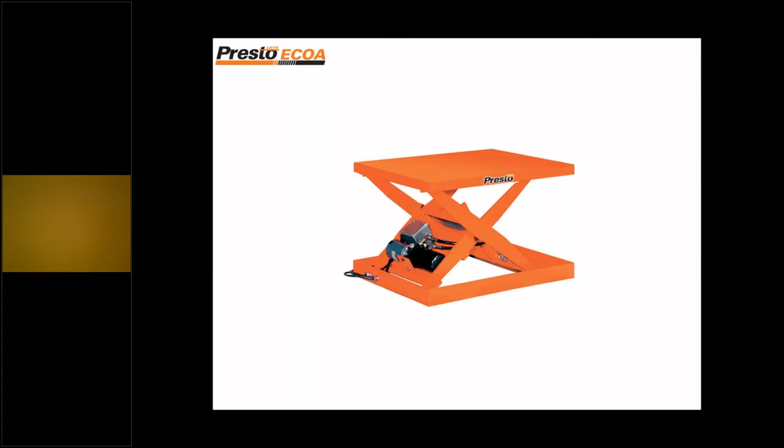So we're going to start today with Presto Lifts. Presto Lifts is our largest line that we represent, and lift tables is our largest category. There's about $150 million a year in lift tables sold in the US every single year, so there are a lot of opportunities. And what sets Presto apart is we're an American manufacturer.

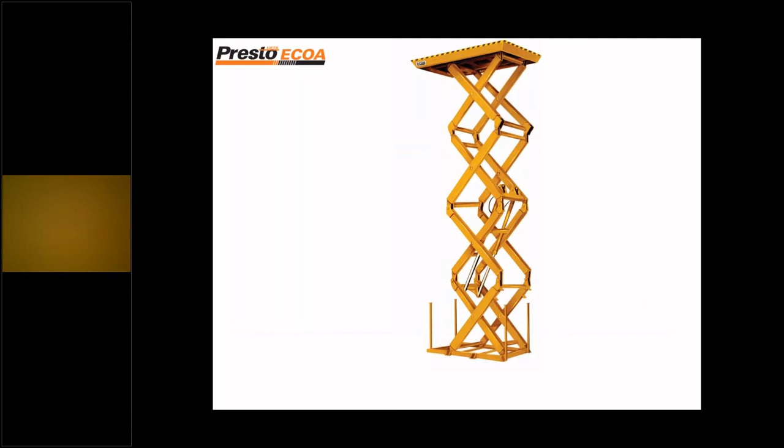We have a standard offering and we have the ability to do customs. Our products start at 500 pounds of lifting capacity, go up to 150,000 pounds of lifting capacity, so there isn't an object out there that we truly cannot lift, raise and elevate up. And our lifting heights go up to 40 feet in the air, standard in our book.

Now, most of our lift tables are electric hydraulic, which means they work off of power, hydraulic fluid pumps into a set of cylinders, and it raises the lift up and down. We also have a full line of pneumatic lift tables.

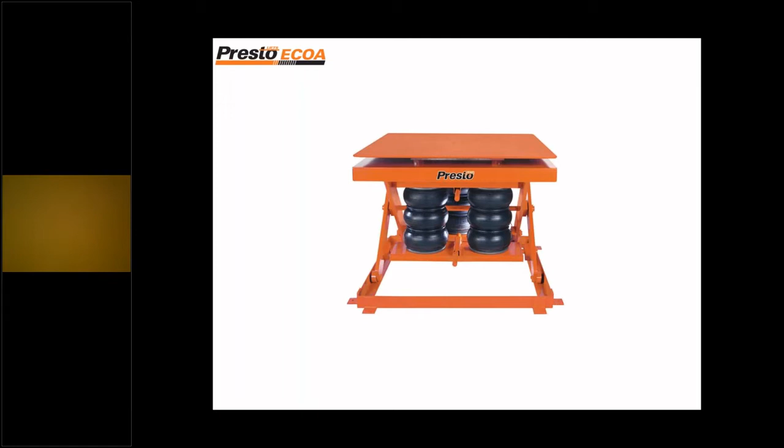This pneumatic offering means instead of using electric hydraulic, you're using compressed air to raise the lift up and down with airbags. There are advantages and disadvantages to each, but one real reason people go with a pneumatic lift table is they don't want hydraulic fluid in the area—maybe they have a cleaner operation, or they have an explosion-proof area where they don't want an electrical motor turning on and off, and we can eliminate that with these tables.

So when you come to me and start talking about a lift table, I'm immediately going to think electric hydraulic unless the customer leads us down the path of pneumatic. But we do have both and can offer all solutions.

So what is a lift table used for? A lift table brings work up to the worker so he or she doesn't have to bend over. We're focused on ergonomics—that's the easiest thing to see. So when we're talking to safety people in a plant, we want to talk about ergonomics because that's what they're focused on in their daily lives.

But for production people, the people on the line, we want to talk about productivity gain because a lift table has a great productivity gain. We're bringing work up to the worker so he or she doesn't have to bend over to it, eliminating 5 to 7 seconds for every part they pick off that pallet. If you have 100 pieces on a pallet that you're working through a day, that adds up pretty quickly over a day, a week, a year.

There's tremendous savings. What we're affording the operator to do is, rather than spend time bending over to do his or her job, they can spend time adding value to the process—machining, whatever they do to add value to what they're lifting up, they can spend more time and focus on it.

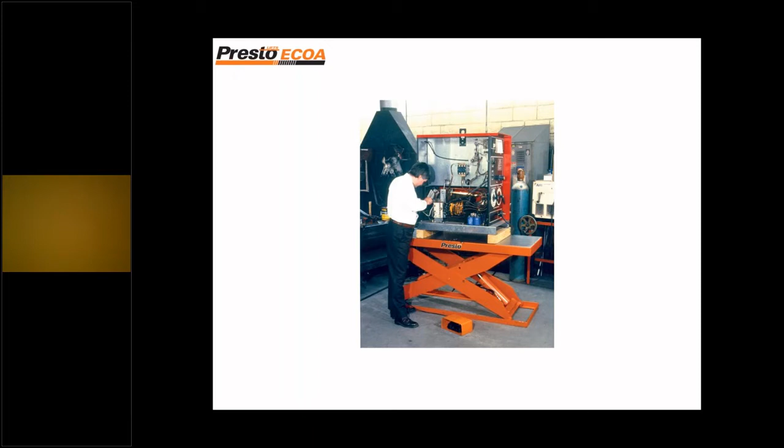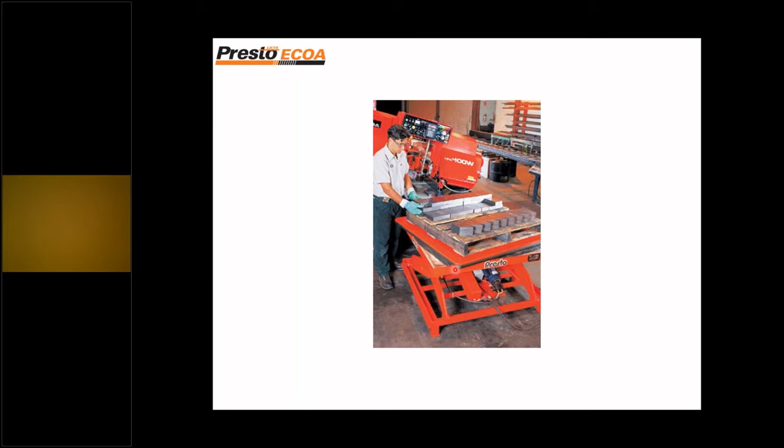Now on lift tables, a very common option is a turntable. A turntable focuses on ergonomics—the bending, the stretching—but it also allows them to rotate the load so they don't have to walk around the pallet. We burn just as much time walking around a pallet as we do bending over to pick up product off the floor. So where people are working off pallets with small parts, a turntable is something you're really going to want to recommend to them.

In addition to turntables, we can put gravity conveyor or powered conveyor on top of our lift tables. Since we're an American manufacturer, we like to do customs—we like to solve problems for people that aren't necessarily in our book. Here we added a V cradle, a simple fixture on top of our lift table to hold this roll in place, allowing them to raise it up and put this mandrel through. Again, ergonomics and time savings—they're able to do their work quicker.

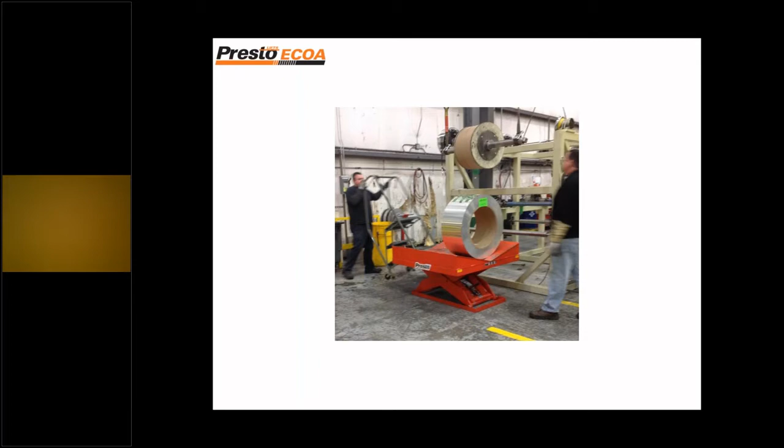Another popular option you'll hear people talk about is an accordion skirt or bellows guarding—this yellow and black piece underneath the lift table. It hides the scissor legs from the operator's view and serves as a visual aid so they don't put their hand or foot in there. Safety people love these pieces of equipment. Maintenance people also like them, as well as us as a manufacturer, because they keep and eliminate dust, dirt, metal shavings, screws, and all that type of stuff that gets thrown around in a heavy manufacturing environment, keeping it out from underneath our leg sets and out of our rollers and scissor legs.

So there is a benefit to the lift itself. Most people don't have the best maintenance underneath our lift tables.

So it's a way in a real harsh environment where maybe you have metal shavings, screws, rivets falling underneath the table, to protect the lift and maybe get your customer a little bit better longevity out of a lift. And here's a nice example of a lift table we did for an automotive manufacturer here in Greenville, South Carolina called BMW.

It's got the skirting on it, as you can see. This table is designed so an AGV drops a load off on one side and the operators come and get it with a cart on the other side, as they need these electric batteries for their electric cars. There's a manual gravity conveyor on here, with a brake release so it doesn't accidentally roll off. We designed some fixturing on top of it to make it more ergonomic and easier for the operators to hold on to something as they grab these tubs and roll them off.

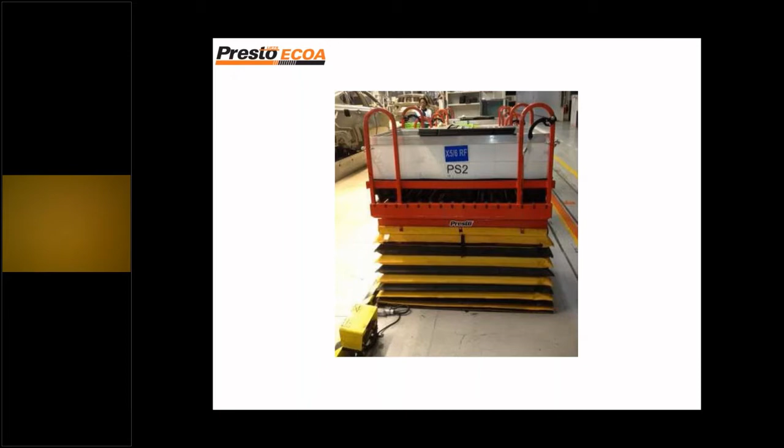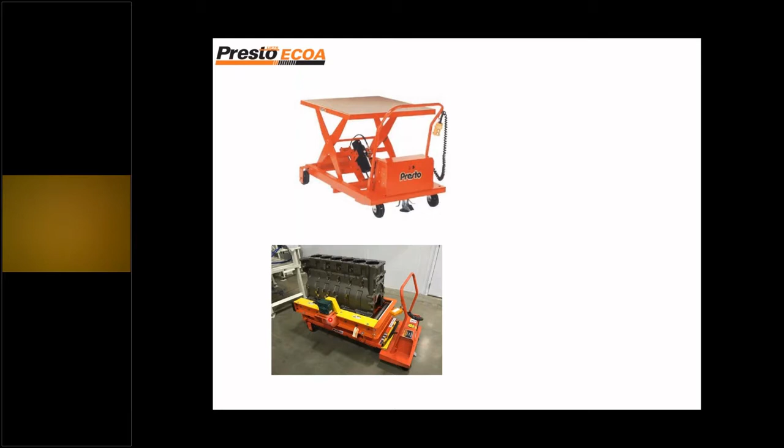Then we can add casters and battery packs to our lift tables. So again, we're lifting and positioning work, but in this instance, somebody wants to be able to move it around a facility. We can add all the same options - conveyor, turntables, bellow skirts, anything the customer may require - to any of our portable lift tables. Again, the concept here is just that you're not set in one place.

Now with most lift tables, we have a 5, 7, 10-inch lowered height, somewhere in that range. So you're going to find people have needs for floor level lift tables - this is a lift table that goes all the way down to the floor and allows you to load it with a pallet jack. These are great solutions for people who either don't have forklifts or stackers to load and unload a lift table, or they just don't want that forklift or powered piece of equipment going into their production area for fear of it running into somebody or something.

So we do offer a full line of floor level lift tables, with a turntable or without. The one thing I will always caution you about is to look at the footprint you have to use, and make sure when you get a quote from us on a floor level lift that it's going to fit in that footprint. This platform is designed to work with a 4x4 pallet.

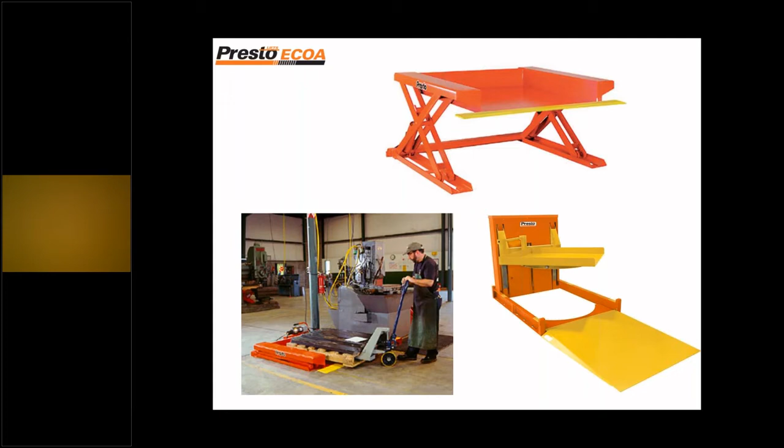It's approximately 68 inches wide by 56 inches deep - it takes up quite a bit of room. The one with the turntable is almost 8 feet long, so you need a lot more room to put these in. Just keep that in mind when you're working with your customer on these lifts.

Now, the next category we're going to talk about from Presto are what we call worker access platforms that elevate up and down. So instead of bringing work up to the worker, in this instance we're going to bring the worker up to the work, so he or she doesn't have to work off of a ladder or scaffolding.

So this is a lift that has gates. This particular side is open because it's up against maybe a refrigerator or a large piece of equipment they're assembling, and the operator can position themselves up and down at the height that makes it ergonomic for them to work. Here's one that we designed.

We made it portable with casters. This particular customer sometimes worked off the right side, sometimes the left side, and sometimes off the ends. So for that application, what we designed is handrails that fold down. Normally these handrails would be up during operation, except on the side they're working on, where they can fold them in half. So again, that's just us understanding the customer's requirements and working a little bit harder to solve their specific needs.

Then on worker access platforms, we have lifts that will raise people up and then telescope them out to get closer to the work. So if you think about working on an aircraft, the fuselage is round, so you may have to come up and telescope out to get closer to that fuselage.

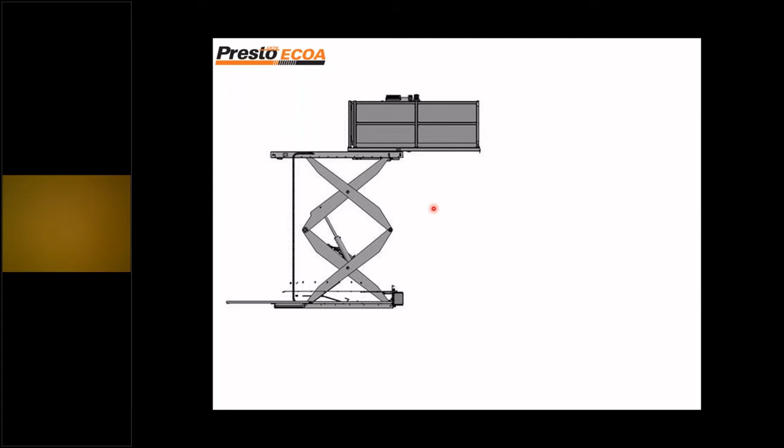Think about a Caterpillar manufacturing facility where they're manufacturing and have to get close to the cab after it's been put on. They want to raise their employee up and telescope them out so they can get close to the cab, overhanging the other part of the equipment.

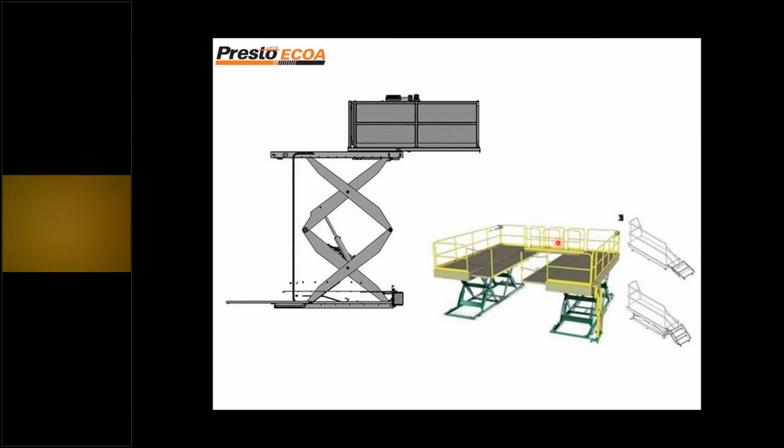Here's a nice one that we designed. It was a U-shaped lift, so the product was in the center, and both platforms slid out 3 feet from the stationary platform. We raise up, slide in these two, and we even have a bridge so they can access both sides. So as long as we can do it safely, we can design a lift table to lift product or to lift people up.

Presto also has a line of dock lifts. We have stationary and portable dock lifts. Down in the South, we don't sell a whole lot of dock lifts, but these are used in facilities that maybe do not have a dock level position. Maybe it's a smaller operation in a retail strip center, or an older building that wasn't designed with a high level dock. So these are designed to lift a forklift or pallet jack up so you can get into the back of a truck and unload it.

The next category from Presto is container tilters, and personally I like these products. We see these metal bins, these wire baskets full of parts in manufacturing and assembly operations, and people are bending over constantly to get into these. So rather than designing a lift and tilt table, which is pretty expensive, we have a piece of equipment called a container tilter that pivots at 28 inches off the ground and rolls the top part of that basket towards the operator, so the operator just has to reach into that bin, that plastic tote, whatever it may be, and access the parts they need.

We can make these stationary, where you load them with a forklift or pallet jack, or portable, where you can wheel them around and go get the load. So lots of different options for these - they can be customized for specific applications. We just need to do a little research and fully understand it, and that's where you'll get me involved.

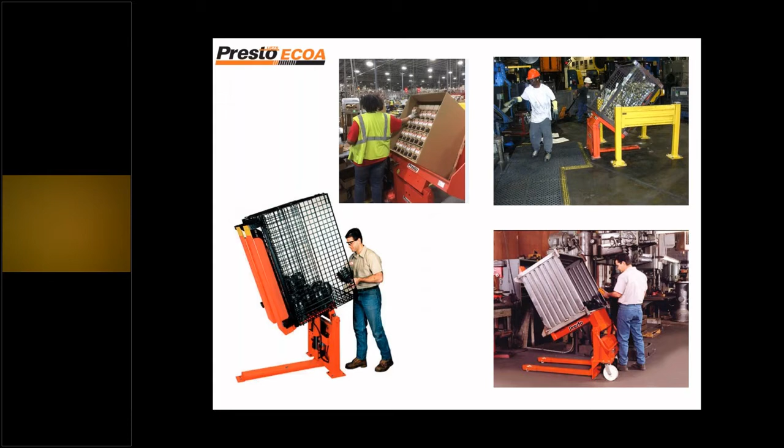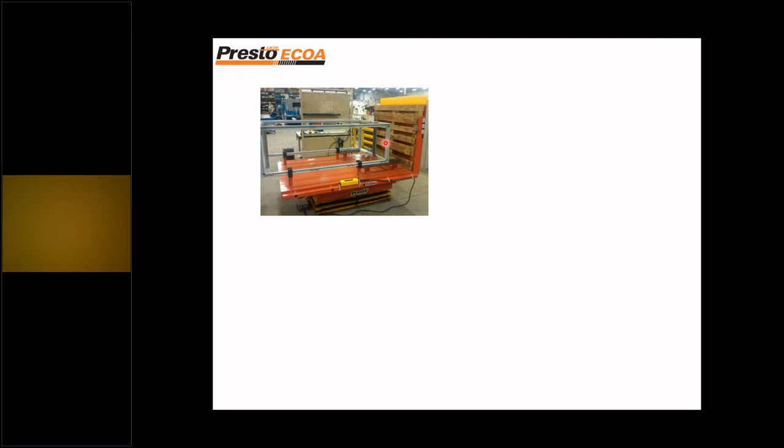Then we've got a line of tilt tables and upenders. What these will do for you is allow you to do some work, assemble. This particular person was building cabinets, and when they were done, they stood it upright on a pallet and were able to move it around. So this is what we call an upender.

We also have the same piece of equipment used in the opposite direction. This particular one was designed for a company that had large steel rolls that came in on pallets, and they wanted to get them off the pallet and from being eye to the sky to a horizontal position. So we loaded it on these forks, dropped that skid on the forks, then tilted it back down and laid that roll down on its side. The reason people go to this rather than using an overhead crane with a sling is that when we lay it down, we protect the sides of it.

We've got this V cradle built into our platform. It cradles that roll real tight and doesn't allow it to crush and pinch the corners. When you do it with an overhead piece of equipment, particularly with aluminum rolls, you'll find that they crush and bend the ends. Now all of these can be designed where the platform or platen goes all the way down to the ground, so you can roll on and off of it.

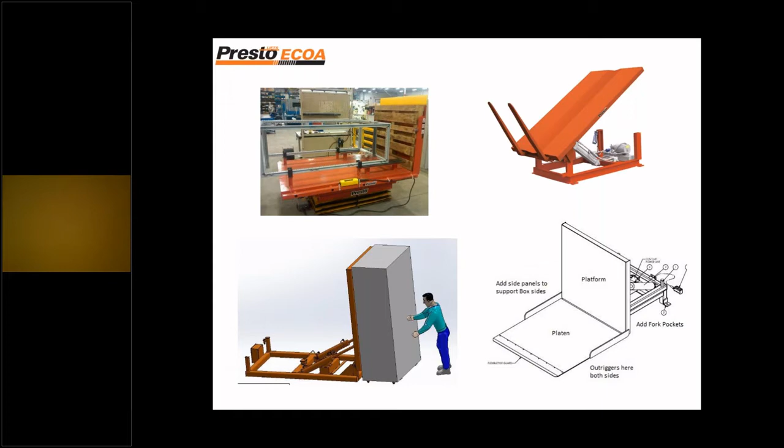The next category of lift tables from Presto are pallet positioners. These work off of a spring or compressed air, and are self-contained. You pressurize the system or add springs, and they self-level, meaning they go up and down based on the weight on the unit automatically.

Whether you're working with 2,000 pounds all the way up to 4,500 pounds, we can self-level your loads. It doesn't matter the weight, we have different spring configurations and different amounts of air you'd put into these units. They all have a turntable built into them.

They have fork pockets. If you start with an empty load and add weight to it, it automatically goes down, taking that interface away from the operator and letting the equipment automatically adjust based on the fully loaded weight. The opposite is true too - if you start with a full load, as you take weight off it will automatically rise. You've got a turntable built into it.

These are very cost effective. So when you find people working with pallets, maybe at the beginning or end of an assembly line, this is a great way to load and unload pallets. What we typically find is someone who buys one of these has multiple applications for these self-leveling pallet positioners.

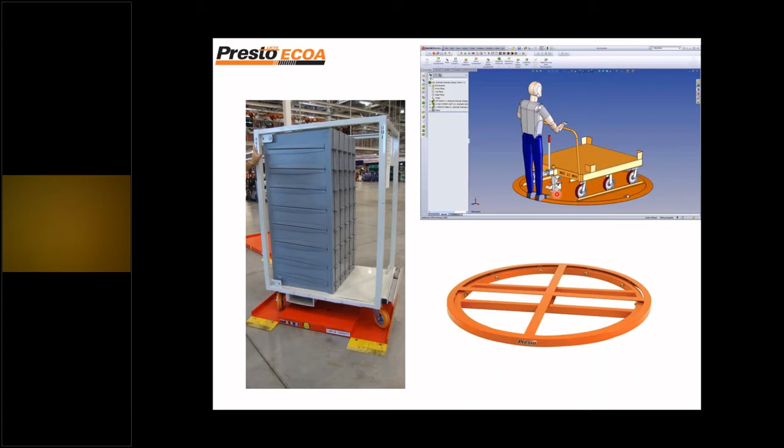Presto has a line of turntables just to rotate pallets on the ground. We have them designed so you can roll a cart on and off of them and rotate them. Here's a couple of cart applications we did.

The last category within Presto is their line of stackers. These stackers are designed not to replace a forklift, but to go where a forklift doesn't go. We're 3,000 pounds or less on our stackers. We've got manual foot pump up and down, and manual push around.

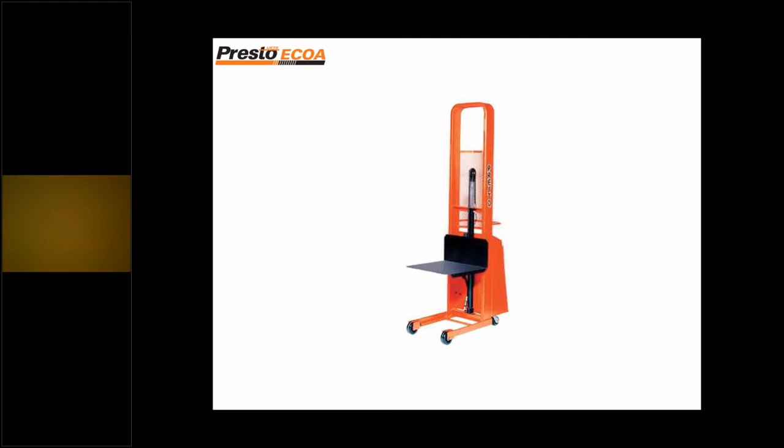And then they go as large as handling full pallets in and out of pallet rack. This wouldn't be replacing a forklift, but maybe in a tool crib area, or maybe they don't want a forklift going into that area. We can get them a stacker that will pick up that pallet and load it onto our piece of equipment.

We've also got stackers that do not have any legs out in front of them, so you don't have to straddle the load. These are counterweighted. They aren't designed to pick up full pallets, they have a 15-inch load center, and are designed to handle fixturing and dies in and out of CNC machines.

And then we've got a line of electric stackers, so these are driven by electric. If somebody doesn't necessarily want a battery inside of it, we can tie it into electric. We do have people that will buy these and use them stationary as a cart lift to lift carts in the air, and we can design them with platforms as well - you could roll a cart on here, lift it up, or roll a pallet on here and lift it up.

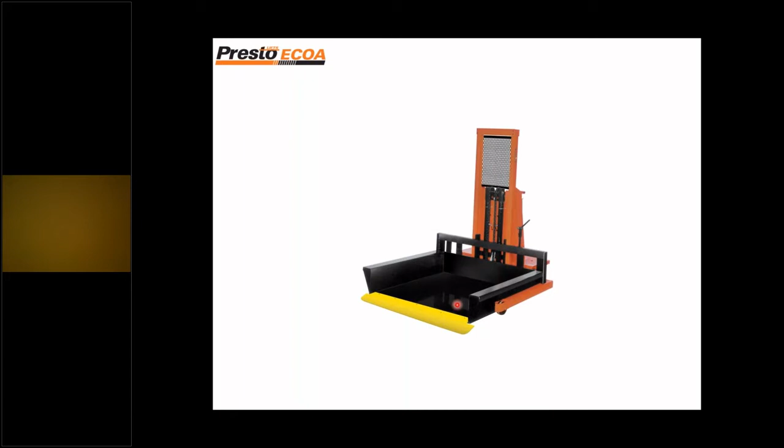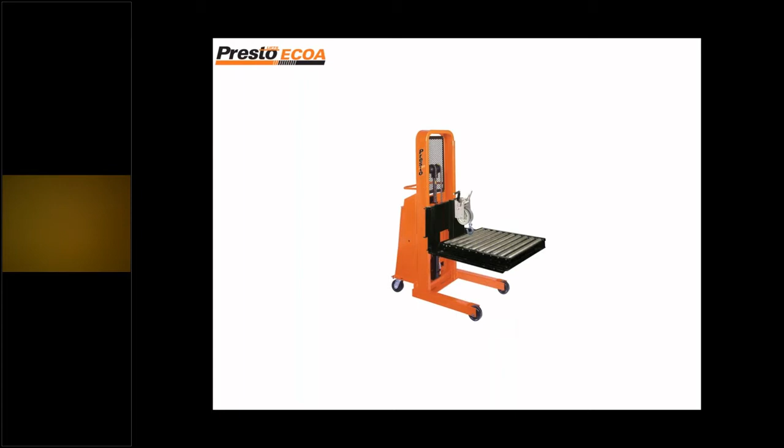We've even got people that will buy these and use them as an inexpensive VRC to take product up and down onto a second level mezzanine. And we can add custom conveyor to our stackers with die pullers, custom platforms, booms, hooks, rams, and drum handling options on it.

And then we've got a line of fully powered stackers - power lift, power drive. We're not trying to replace a forklift, we're trying to go where a forklift maybe cannot go, or where somebody doesn't want to take a forklift. We have them that go up to handle 125 inches of lift height, up to 3,000 pounds.

And then Presto has a new line of transporters. This footprint is 2 foot by 2 foot, designed to lift up to 400 pounds, and has a platform where we could put forks or a few other attachments on the front of it.

This particular piece is designed for applications where somebody maybe has a limit of 35 or 45 pounds that they're able to pick up and handle. So we'll design these to handle boxes, maybe in and out of shelving, or handle bins and totes that have some work in process in a facility - smaller loads that people need to move around, making it easier to move around.

The unit itself only weighs about 85 to 100 pounds, depending on the capacity of the unit. Simple to move, it goes in and out of doorways, into tight areas without a problem. We do have a few static end effectors - a boom and a hook, a V cradle, a ram - very, very simple end effecting.

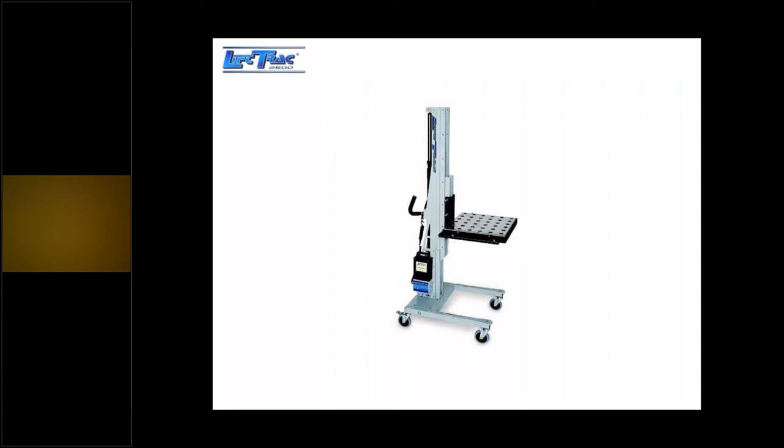When you need to get a little bit more custom off the front of it, we have a line called Lift-Trac. Lift-Trac manufactures the same thing, a transporter, but we do custom end effecting off the front of it. These custom end effectors can be designed to handle anything up to 600 pounds of capacity. Here we're picking up a roll off of a pallet, raising it up, and loading it into a machine, power tilting at 90 degrees to get that core horizontal to the floor.

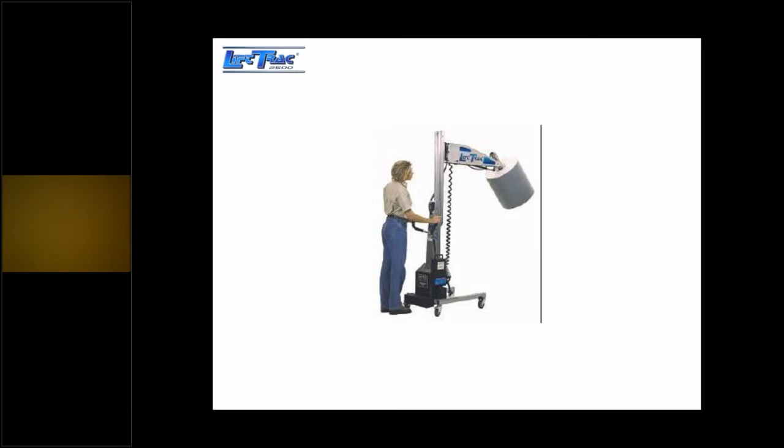Here's one we designed to grab a tote off of a stack, raise that tote up, and then dump the product onto a conveyor line. These totes weighed 450 pounds.

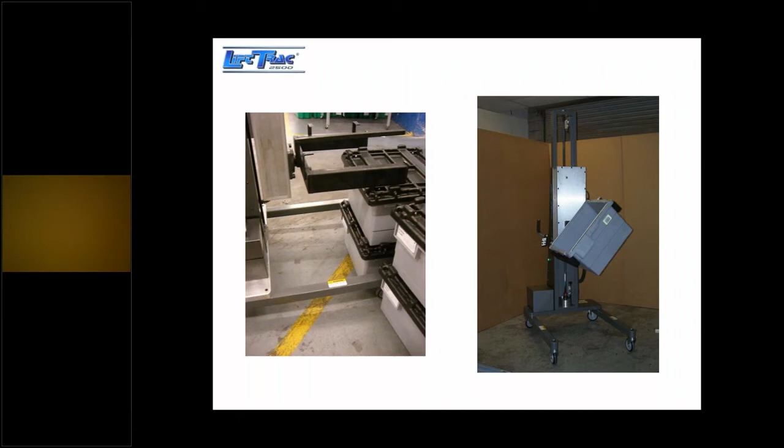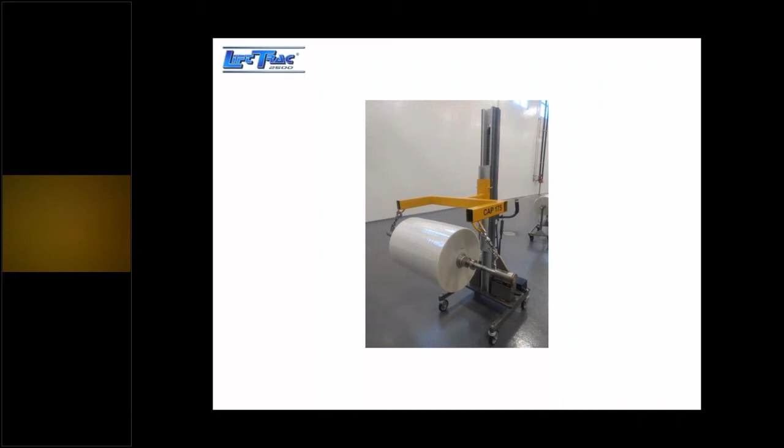Here's one we did for Tyco, where we're going in and picking up a reel that weighs 560 pounds and loading it onto a machine. But what we designed here that was a little bit unique is we built rollers into the ram to make it easier to push that 500+ pound core reel off.

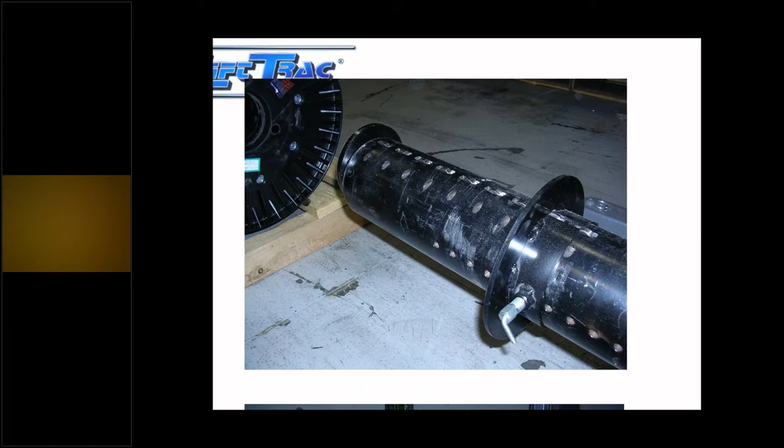We designed an end stop that was a manual flip. You just pulled this lever and it would flip up the end stop, the nose on it, to keep the roll from sliding off during transportation. And then we designed the end effector itself to tilt 10 degrees up or down because their floors weren't level and their machines weren't level, so we had to make sure we were able to handle an unlevel area.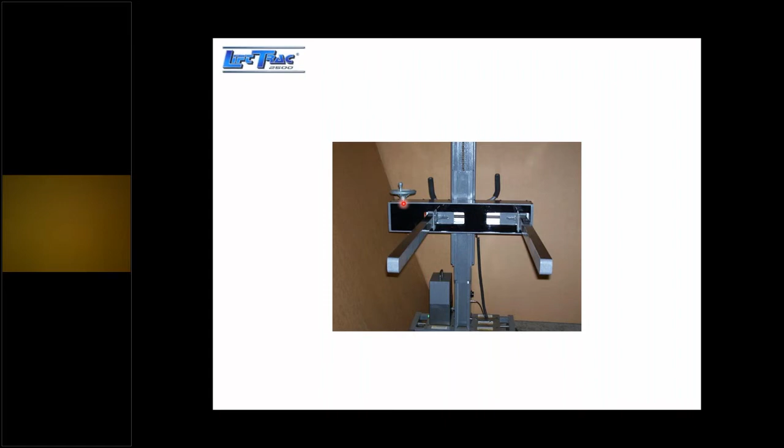Here's a clamping operation, and rather than it be a powered clamp, we did a manual turn clamp to it. This customer didn't want to crush what they were picking up and clamping onto.

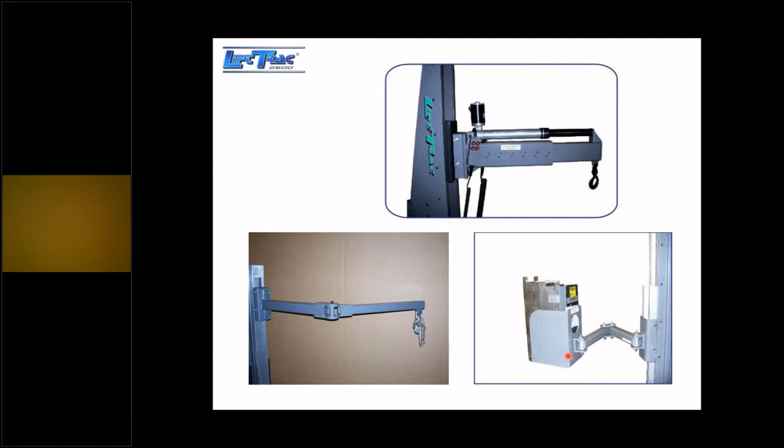And here's an arm we designed. It's holding this 55-pound piece of electronics, a subassembly that got built. Then they had to put it into a cabinet that was 18 inches deep. So we designed this arm that would reach and extend into the cabinet so they could line it up and bolt it in place rather than having to hold it by hand.

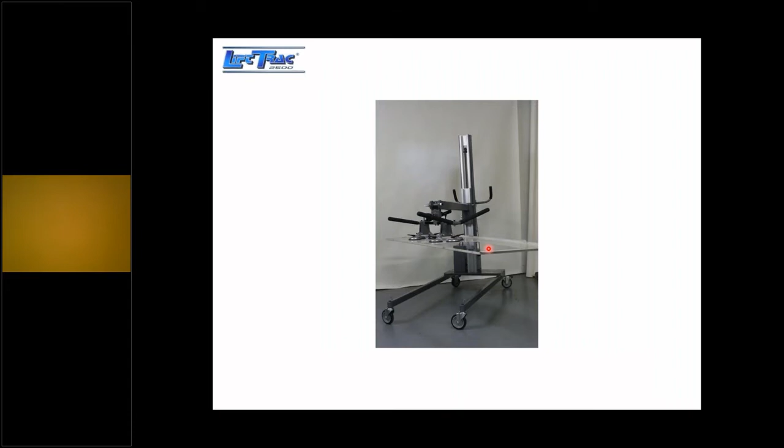Here's a windshield for a bus manufacturer. We're grabbing it out of a crate, picking it up, putting it onto a bus.

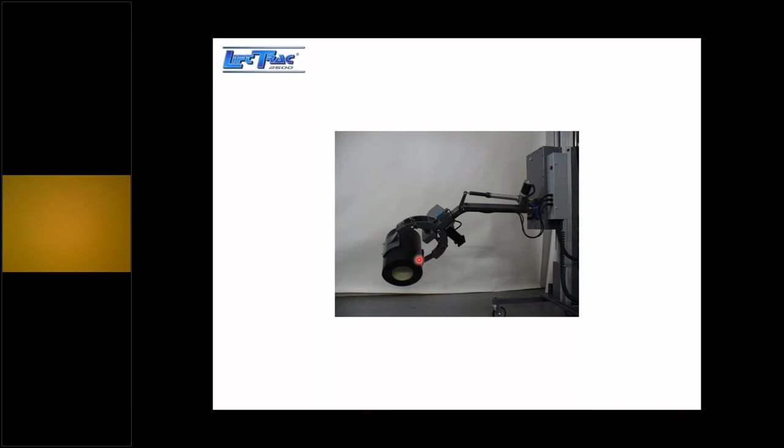Here's one we're not sure what we were grabbing, they wouldn't tell us, but this is almost like your arm. Here's your shoulder, it pivots. Here's a pivot point like your elbow. Your fingers, your hand, your wrist are all right here. So we can reach and go around a corner with this into a cavity for this operation.

Now we can talk a little bit about Milagon's anti-fatigue matting. A lot of matting out there is being sold, all of your customers are using it. 90% of people are buying a foam mat with a vinyl cover over it. We offer a little bit different product. We have a recycled 20-inch by 20-inch tile with male and female ends that pieces together like Legos, and you can create any size, any shape you want.

Now this product doesn't have any foam underneath it, so it works a little bit different than those foam mats. This product is heat resistant up to 800 degrees. It's oil resistant and chemical resistant, so we can put it into those oily environments and it's not going to break down and fall apart. Now the way this mat works, it's different than the foam mats.

On the bottom of each of our mats are 144 compression columns. These work like shock absorbers. When you step on it, they absorb the impact but keep you up on top of the work surface.

The downside of a foam mat or a rubber mat is you sink into it. Now when you sink into the mat, it's kind of like being at the beach, you restrict the blood flow in your legs. It feels good at first, but over time when that blood flow is restricted, your legs start to burn, like walking around in sand. The same thing's happening in foam. It's not giving the body the support it needs. So we're able to keep the operators up on top of the work surface and create an ergonomic work surface for them.

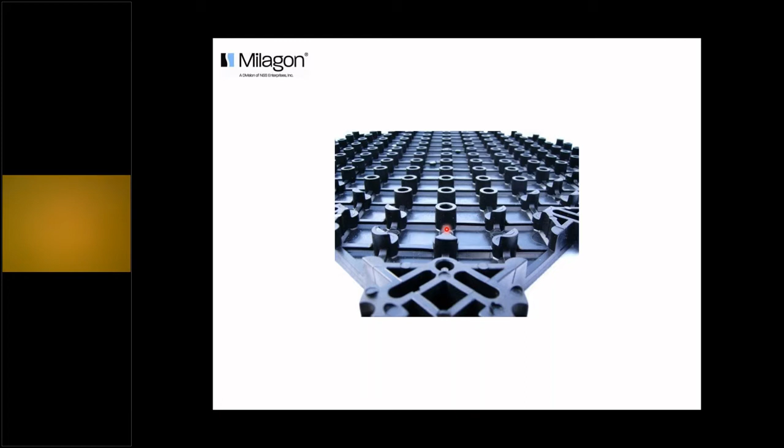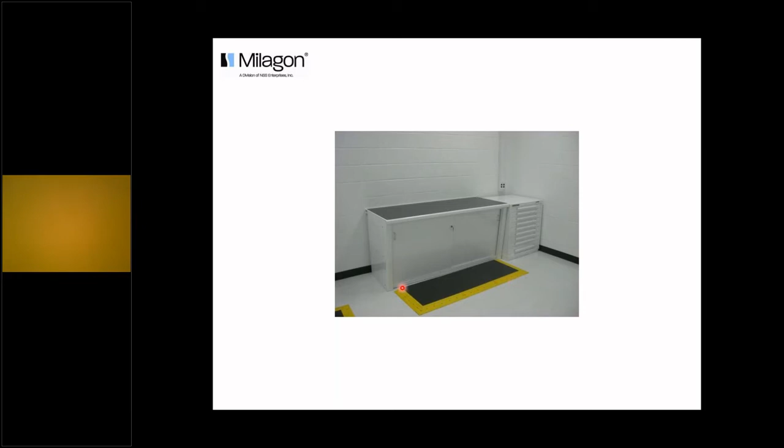Here's an example of a race team that used them in front of their benches. It's a real clean look. One tile fits here, this is 3 tiles put together to create one mat.

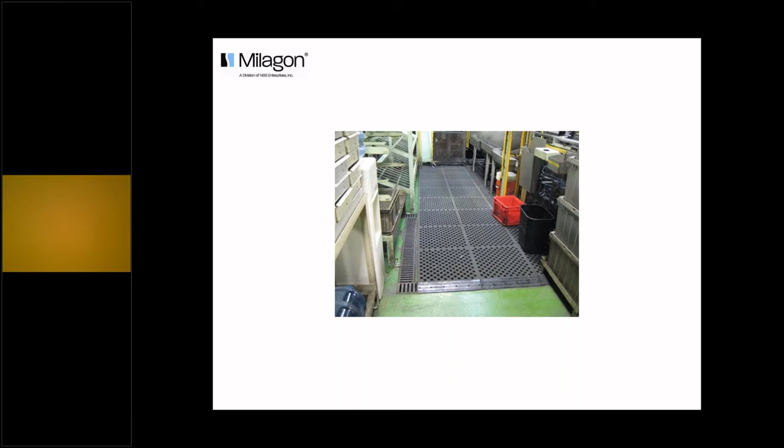Here's a real nice one we did. You could do this with foam, a nice long run, but you'll notice our mat stays nice and straight. The other advantage is they've got these carts here, and since our mat keeps you up on top of the work surface, you can roll these carts onto our mat and you're not going to hurt it. You can drive forklifts over our mats and you're not going to hurt them.

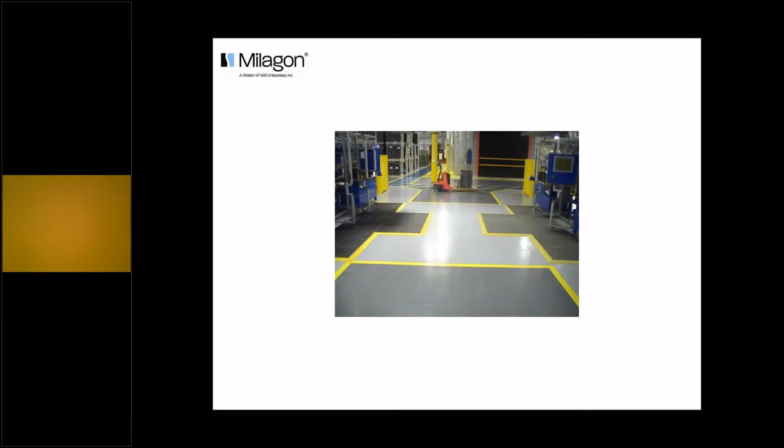There's no trip point for them. On a foam mat, you would have had a bump where that went through it. Here's just showing some custom shapes. Again, you can drive forklifts, pallet jacks, carts over our mat. You can put our mat on bar grating. We offer a 10-year warranty, which means that mat will react and work the same 10 years from now.

Milagon also has a full line of chairs for people that sit. Now most people in the environments I go into are standing, but there are a few that sit to do their job. These are assembly chairs. They're true ergonomic, there's 10 degrees plus or minus movement in the seat and in the back, so the chair constantly stays with you as you're moving.

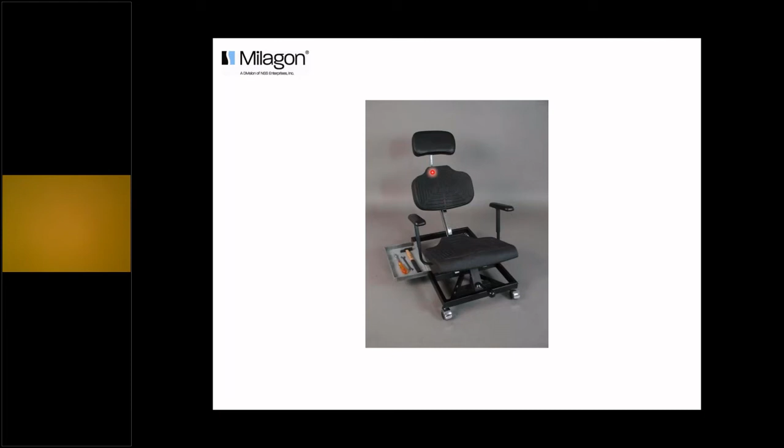Here's a sit-stand for temporary relief. And then we can do some custom chairs where maybe you have to work on the bottom side of a piece of equipment. This was designed for a helicopter manufacturer—the person sat in it and laid back to do their assembly work.

The last product line in the assembly area is Treston, which makes height adjustable workstations. Someone buying a $99 bench from a catalog isn't our customer—our customer is doing assembly work. They want it ergonomic, with movement up and down for operators, and they want to design a work cell that lets the operator hang stuff from overhead, like a light or a balancer.

Here's a vacuum system we hung from overhead that this gentleman works with. All of his tools can get hung on this board in the back. He's got drawers down here to store stuff, and a shelf for his dies and fixtures to sit on.

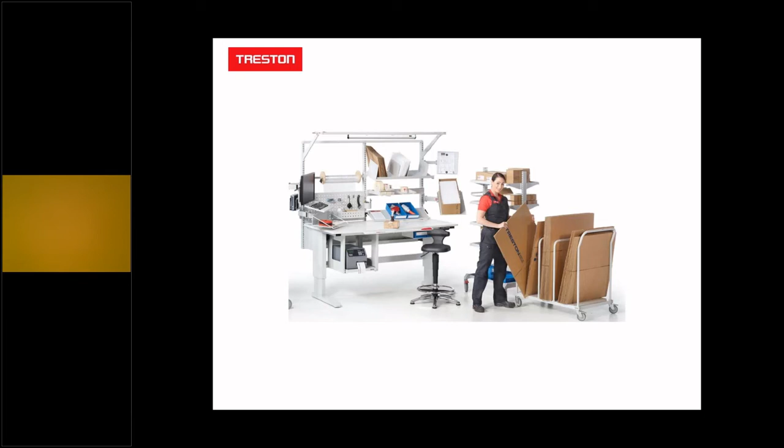This particular guy wanted to sit, and then we've got a workstation over here for a packaging operation where this person wanted to stand. But you can see the same thing—a place for the printer underneath, a place for the keyboard and monitor. Everything is up off of the workbench, because on this bench, really all you should have is what you're packaging or assembling. Everything else should be kept up off that area.

That allows us to do a couple of things. We can make the bench smaller, because maybe you don't need all that assembly area that somebody might need if they were putting their computer and printer on top of the work surface as well. So we're shrinking the footprint, which we all know is expensive in manufacturing facilities.

Here we have some tool boards where we're hanging tools vertically, just a different way to store product. This gives you a little bit better visual of your product rather than storing them in drawers. This unit is 3 foot deep, 7 foot high, and 3 foot wide—it takes up just 9 square feet, and you can store up to 10 of these perforated metal panels vertically.

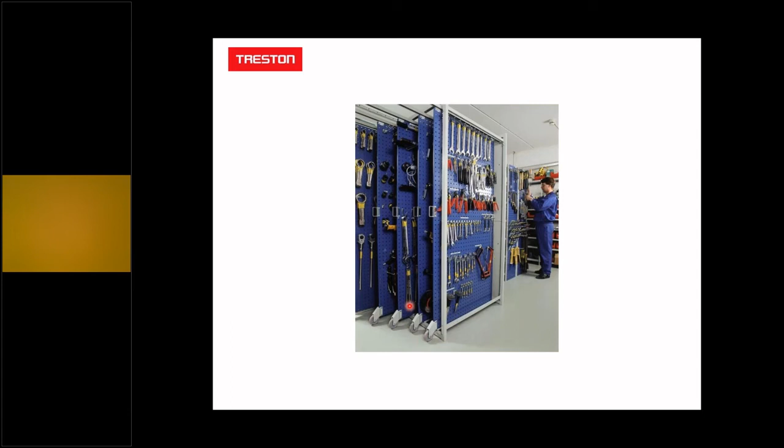We can take these panels and put them on carts. This one was designed for Caterpillar—they used to keep all of this in toolboxes, and we designed it so they could hang all of their tools. They no longer have to go through drawers to look for products, which makes them a lot more efficient at turning to find the product or tool they need to work with.

Here's just some examples—we can do shelves, we can put bins on them. Here's that tool product we sold to Caterpillar.

Then we're going to move into a little bit of storage. We represent Quantum Storage Systems, manufacturer of plastic bins, shelf bins, parts bins—every bin you can imagine, we manufacture. We are the manufacturer of it, and we manufacture this in Miami.

The one commitment the owner of this company has made is you will never lose an order to a catalog house. So if you have customers using bins bought from a catalog house, the easiest sale you can make is to take this catalog to the purchasing agent, drop it on their desk. They'll flip through it and tell you what bin they're buying, and we'll make sure you're competitive and can get that order away from those catalog people.

So we have bins for shelves, bins that hang in systems. We've got clear bins so you can visually see what you've got in them—a full line of clear bins. We can put our bins in cabinets and sell you the system, put our bins on portable systems to be wheeled around, and use louver panels to hang bins on walls.

We also have large bins for distribution—what we call a divider box, or a container that allows you to store multiple products inside the same box and separate them with dividers inside. The electronics world uses these for sub-assemblies quite a bit, as well as the pharmaceutical world.

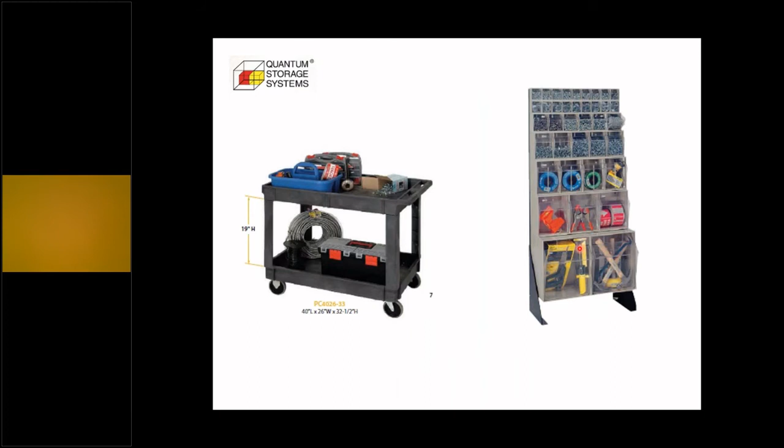We have collapsible containers as well for those large parts, and storage for smaller parts. We have flip-out bins so you can visually see what you've got and get your parts real easy. Here's a plastic cart that we sell.

And then we have a full line of wire shelving. Most people think of wire shelving for pharmaceutical or food service applications. That's true, but we sell a lot of wire shelving into manufacturing facilities too, and the reason is dust does not collect on our shelves. We can make these shelves in different widths, different depths, and different finishes or colors if necessary.

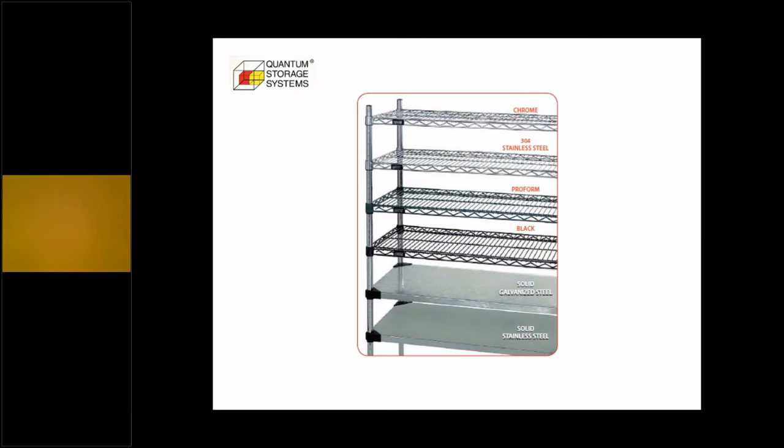In the distribution world, people like these carts because we can put them on wheels, and they're an economical solution for a picking cart. These are all height adjustable on 1-inch centers, so as their load changes, they can quickly adjust the cart for that need. Here's some shorter carts for maybe a manufacturing environment where you need to move goods around.

We have security cabinets that can be locked to store product on a plant floor, but you can still see what's inside. We have linen carts for the hospitality industry. We can take our shelving and put it on a track system that moves right to left, so we can create higher density storage and store more in less space. We have a floor track and an overhead track as well.

And then we've got a line of steel shelving that can come with or without bins. Again, we're here to guide you through all of these types of applications.

Now, Mid-States is a steel fabricator, and they can make anything you want out of steel. Here we have an order picking cage, or a man-up order picker. Here we have a steel pallet for John Deere, a custom designed cart.

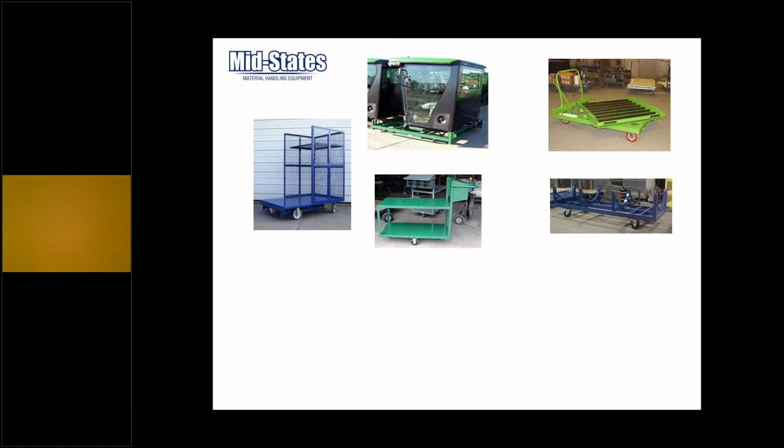Here's a platform cart with a turntable and rollers on it, and this cart was actually designed to roll over a lift table so it could be elevated up. Bar stock carts, expanded metal carts, and a full line of trailers. Anything you need customized out of steel, Mid-States can do for you.

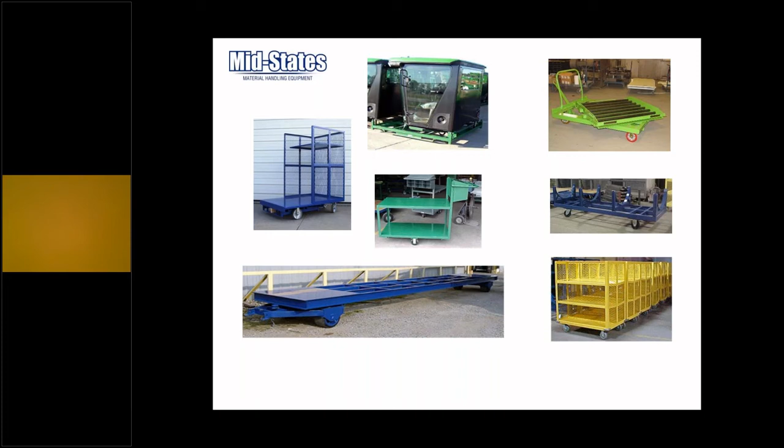Now, we're not going to sell a 2x4 platform truck out of steel from Mid-States. Our cost point is going to be too high to compete against those catalog houses. But where somebody needs a custom platform cart or custom trailer, we can handle that.

Another category Mid-States does a good job with is height-elevating worker access platforms. This is a stationary height worker access platform. It's portable, on casters in this particular instance—doesn't have to be, but this one is. Basically, this gets an operator up 18 inches higher along an assembly line so they can do their work. We do a whole lot of these worker platforms.

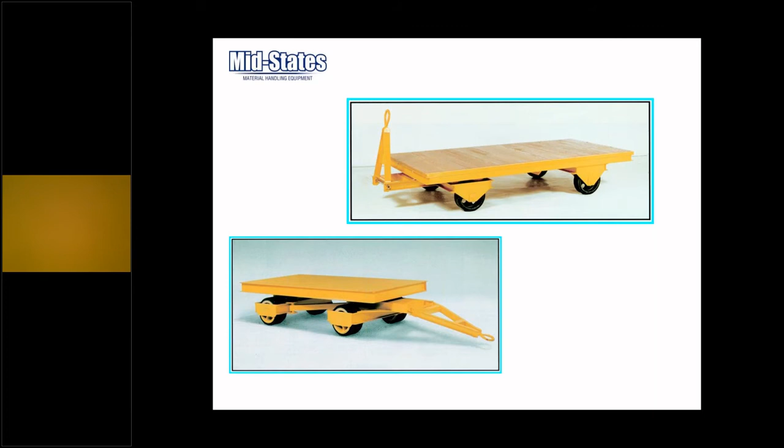We do a whole lot of trailers with Mid-States. These get tugged in factories, and they put their goods on it. Capacities on these trailers can range from 1,000 pounds up to 200,000 pounds. These are tugged behind a forklift, or maybe even with a tugger or an AGV. They can be designed with four-wheel steer—this one right here is four-wheel steer, which means it'll self-track at the end of a line.

And then Mid-States has a full line of stainless steel carts, stainless steel trucks, stainless steel products. Anything you need out of stainless steel, we can design and fabricate for you.

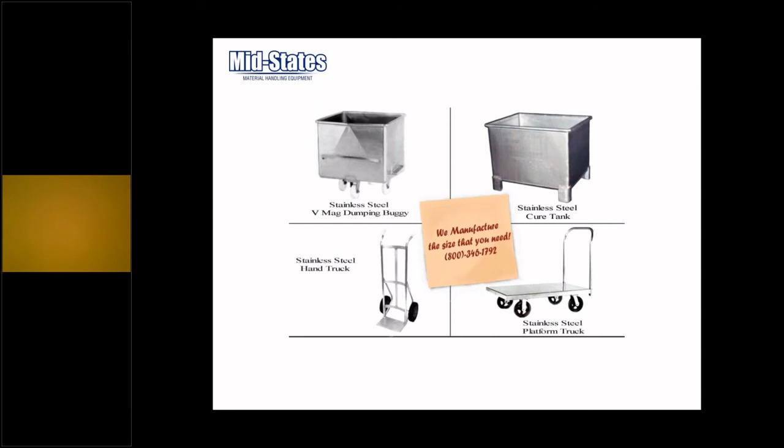The next manufacturer is New Age. New Age makes everything out of aluminum—very similar to Mid-States, except we're changing the metal. We're working only with aluminum here. So aluminum carts and aluminum pallets are a big mover for us, along with pallet stands and worker access platforms.

And then we have three distinct categories that we sell, starting with picking carts. Why would somebody want an aluminum picking cart over a steel picking cart? That's what people always ask us. Well, there's a few reasons. Number one, weight—this cart only weighs 75 pounds.

If we built it out of steel, it'd be close to 350 pounds. If I'm pushing a cart around all day long, I'd certainly like a lighter cart—I can push it a little bit easier. Number two, this can be stored outside.

It can be washed down, it can get wet, it's not going to rust. That's an advantage. Number three is paint finish—we're not painting our carts, this is aluminum, so you're not going to have paint chips, you're not going to have it scratch, and it's not going to look as bad over time as a steel cart. They're just as strong, just as durable as steel.

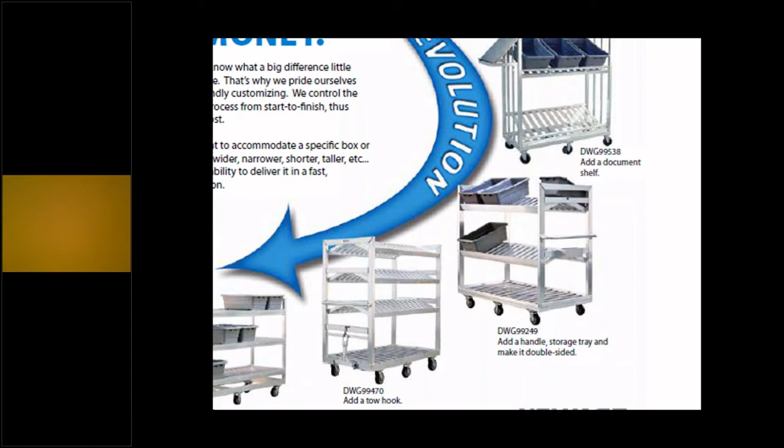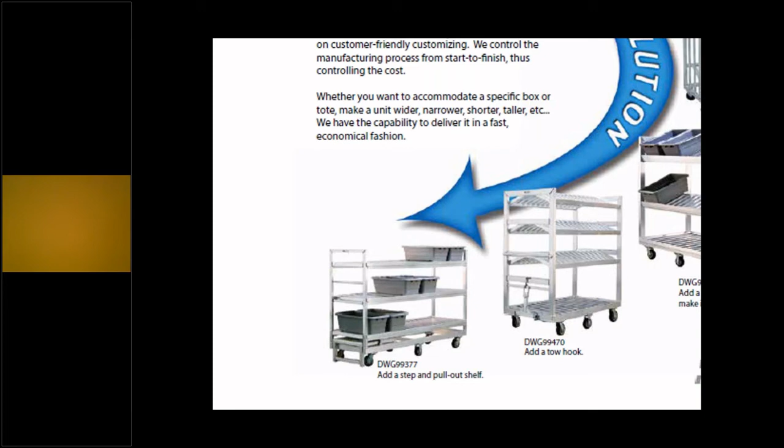The other thing we do that's really great is customize our carts. Here's our standard cart, but we'll make little changes—angle the shelves more, make them longer, add a drink holder, tool holder, iPad holder, or clipboard holder. Maybe they want to pick from both sides, so we'll V the shelves up so you can put bins on both sides, put a tow bar on so you can tow it through a factory. This particular one has a step stool that pulls out so they don't have to reach up so high into the shelving.

The advantage when we start making these small fabricating changes is that we separate ourselves from the steel guy. If you're talking to somebody about carts, the odds are the other two or three guys talking to them are talking steel. You can differentiate your sales process by talking aluminum—you'll be the only one talking aluminum carts.

What we always want to do is ask questions of that customer: what are you doing, how can we make this a little different for you, incorporate some of these options or features? The reason we like to do that is the end user starts to buy in, starts to build a cart specific to his requirements. We also differentiate ourselves from the steel guy because he's usually not doing that.

The price of our aluminum cart starts out a little more expensive for the standard, but when we start making these changes, our aluminum price doesn't jack way up. Steel guys are set up like an assembly line—they don't want to build customs, so their price goes way up on a custom cart. That's something that will help you differentiate yourself and really help solve your customers' needs.

We do a lot of pick carts, and a lot of what we call ladder carts—these have steps on them, so you can get up three or four steps high. We're customizing for specific needs: a tool tray that pulls out, fork pockets so you can lift it up and down on a mezzanine, a center pivot wheel so you can turn in your own footprint, longer angled shelves, an iPad holder. We work with the customer to really understand his or her pain points.

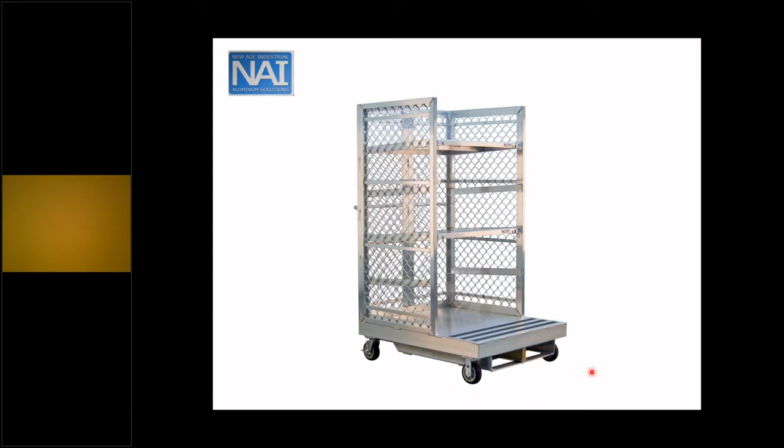We also have a full line of order picking cages designed to go onto a man-up order picker, a device that takes an operator up into a pallet rack to pick goods. Most people just put a pallet on the end and throw goods on it while they're up 20 or 30 feet in the air. We make cages that allow a smooth transition from their platform onto our work area, giving them shelves, bins, or cubby holes to store products. We put these on casters because when they're done picking, someone has to come get the pallet to package it out—you can simply grab our cage and push it over to the packaging area.

We do the same thing here as before: you need shelves that flip up, we'll design it; you need doors on the back, we'll design it; you need cubby holes so you can pick specific goods to specific areas, we'll design our unit to take care of that for you.

Now we're going to talk about some facility products. We represent a modular office line called In-Plant Office, manufactured in St. Louis. These offices are like a room just like you're in right now, but it comes together on a pallet and goes together almost like an erector set.

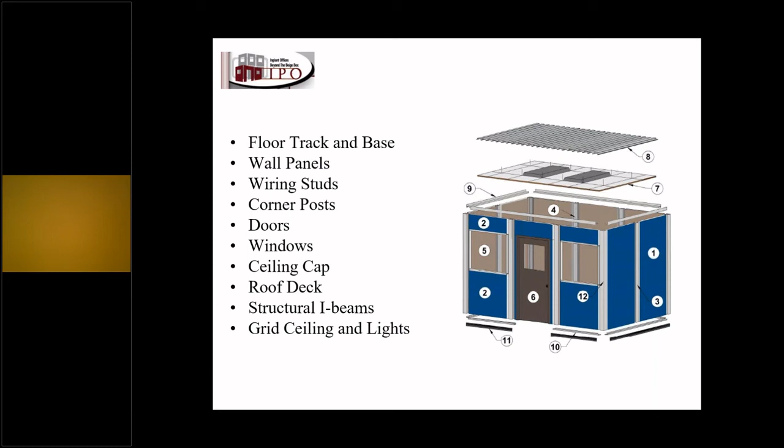So we've got a floor track, raceways, wall panels, windows, doors, a roof, drop ceiling, everything that the room you're in right now has. The main difference is we don't have wood studs. We have metal raceways that hold our panels together and act as electrical chases.

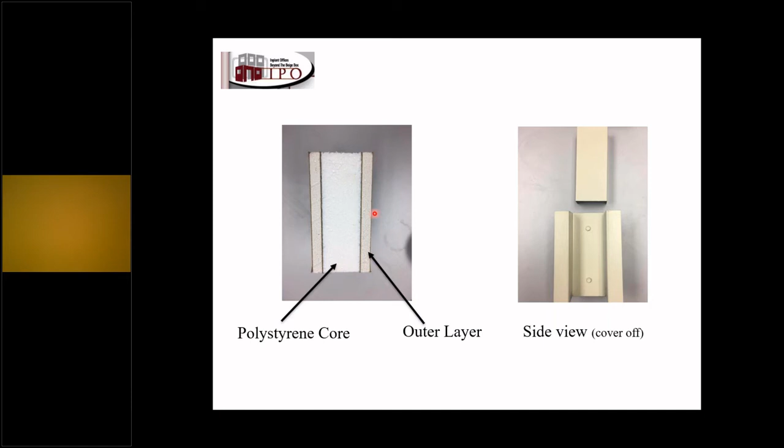And we don't have that pink insulation inside of it. We use a polystyrene center that holds our panels together, with sheetrock on either side for insulation and for sound. Then we've got a vinyl wrap on the outside that makes it real easy to clean fingerprints.

Now, why would somebody want a modular office over having someone traditionally stick build an office? Well, some of the benefits are, number one, time savings. This office complex right here showed up on a Monday and was installed on Monday and Tuesday.

The installer showed up when it showed up, got it installed in 2 days, and Wednesday morning people were moving into this complex and starting to use it. You cannot do that with traditional stick construction. It's going to take months to orchestrate all of this.

Number two, with modular construction, everything's prefabricated when it shows up. There's less distraction because we're not sanding, we're not having all this debris, cutting wood. This is all prefabricated, so there's less distraction to your workforce.

Because you and I know whenever somebody walks in to do something at a manufacturing plant or distribution center, everybody that works there stops and looks to see who it is and what they're doing. We minimize that distraction because we're on site for less time.

Number three, if you need to move this wall out 5 feet, with traditional construction you've got to tear that wall down, throw everything away, and rebuild it. With us, you move that wall 5 feet, add another 5 linear feet of other walls, some additional roof, boom, you're done.

Number four, we can move this. So we can take this down and move it within the building we're in or to another location. You can't do that with traditional stick-built construction.

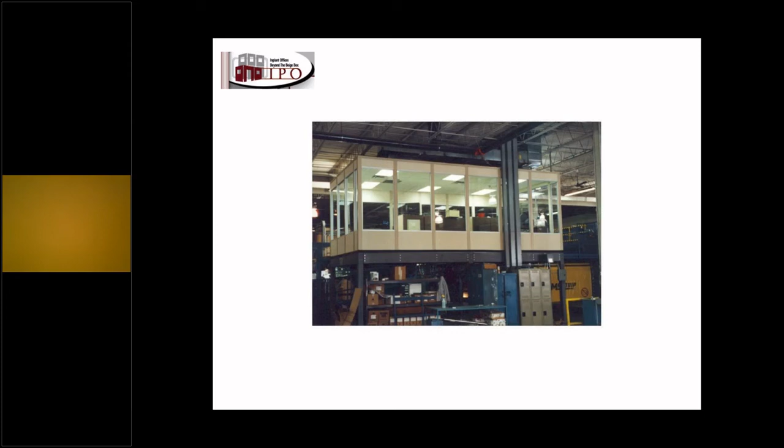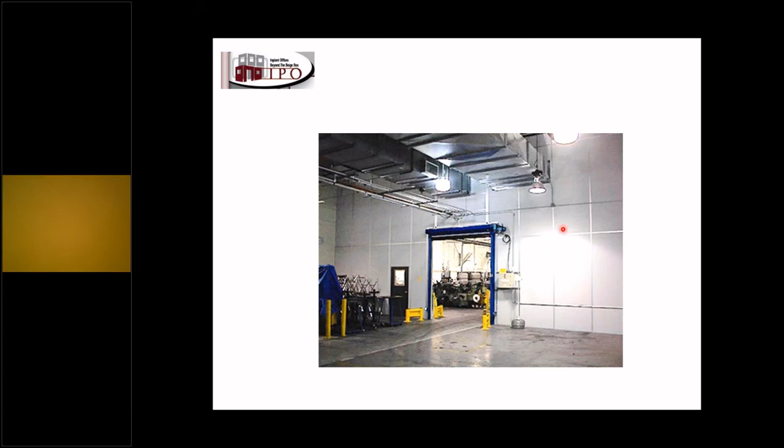Here's one where we did a room and then did load bearing. We made the roof support 125 pounds per square foot, so essentially it's a 2-story, and we put storage up top. Here's a wall that we designed to separate two areas of a facility, with a high-speed door inside of it and a man door.

People do conference rooms, board rooms out of them, bathrooms, break rooms, lunch rooms. We see them everywhere. We can do guard shacks, control towers, and then we can make our offices portable as well, where you can move them around a facility.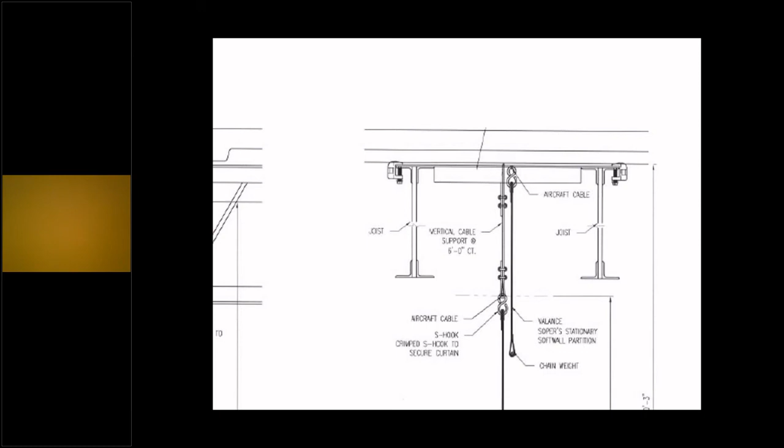We put an upper valance so piping and sprinklers and things can run left to right through here. We do our cutouts in our upper valance, and then we hang our lower curtain down below it.

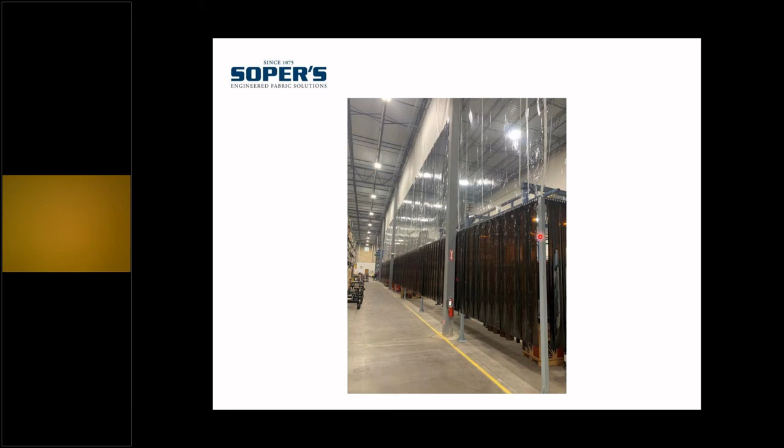Here's a grinding operation we did for a customer, 150 foot by 60 foot square. What we did unique here is clear vision, because they wanted the light transfer, and in the whole bottom are tinted strip curtains. So you can access this building 360 degrees all the way around. There's no doors, these act as your doors.

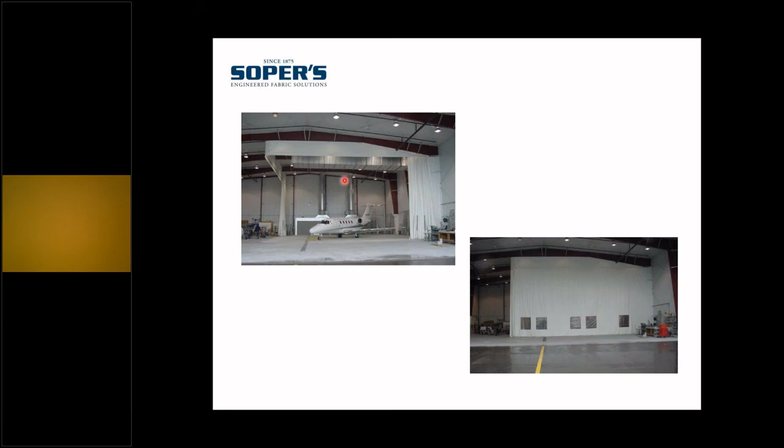These can also be retractable rather than stationary. There's just a rope that hangs down that you grab and you push it open and closed with. They can be outside as well, and when we do outside, we put grommets in the floor with straps to hold them in place so the wind doesn't blow it open.

We can also make the whole room expand out. This one is 30 foot and contracts all the way down into 7 foot. This particular operation had to bring something in that was large from overhead and set it in place, so it was easier to have the room pushed back, set it in place, and then wrap the room around it.

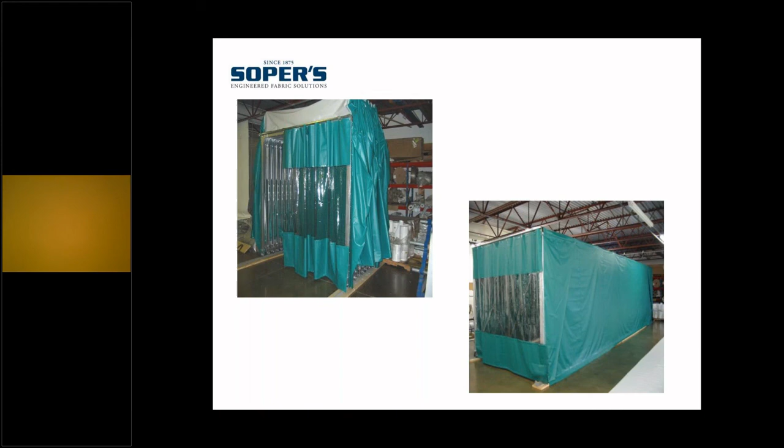We've also done applications where people are maybe doing a process once or twice a week for a couple hours, and they want to contain that process only during that time period without committing that floor space. So we'll design the room that can be pulled out, used when doing that process, and retracted away when not in use. We also do a lot of sound containment, like this example of a bunch of equipment that made a whole bunch of noise.

We enclosed it, and it looks a lot nicer in my opinion. We've got vision panels so we can see the controls. We put air inlets on either side with fans to bring fresh air in and keep everything cool, and we contain that sound from rolling throughout the factory.

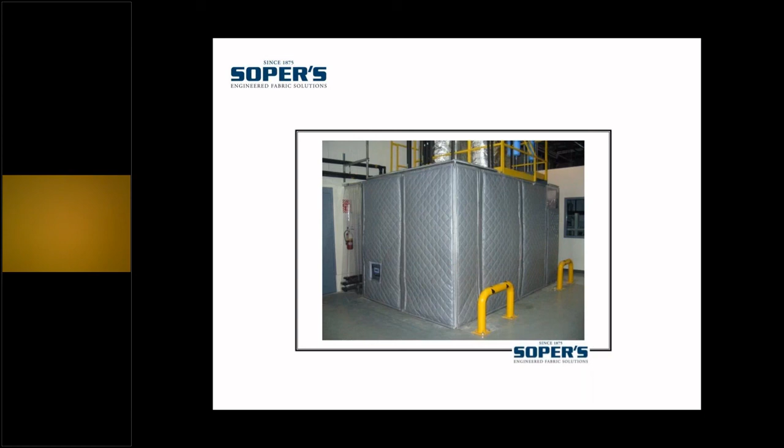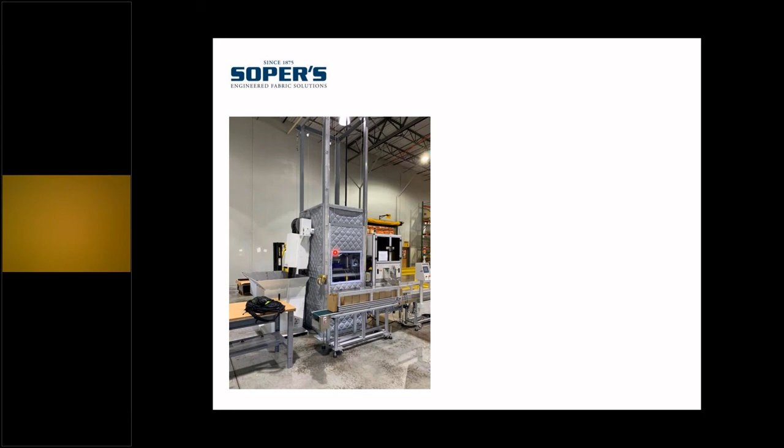Here's another sound containment we did. This was a piece of equipment that made a lot of noise, but the noise was all concentrated in the center, in a chute that parts were being dropped down into. So we just contained that center part. We put a vision panel in it so they could see what was going on if it got jammed. And then they needed the doors or the sides to open up so they could do maintenance, so we put a track that allowed the sides to open all the way up so they could have full access to it.

And then here's another one we did for sound, for an aviation manufacturer. They had a large bearing that was coming in from overhead, so we had to make our roof power retract open so they could bring the overhead crane in and drop it in place. And then we made the doors fully open in the front, accordion style.

So we're an engineering company, we can design it to meet the specific needs. And again, we can do it turnkey, from design to install. Anything that needs to be installed, we'll get you an installer locally that can take care of it for you.

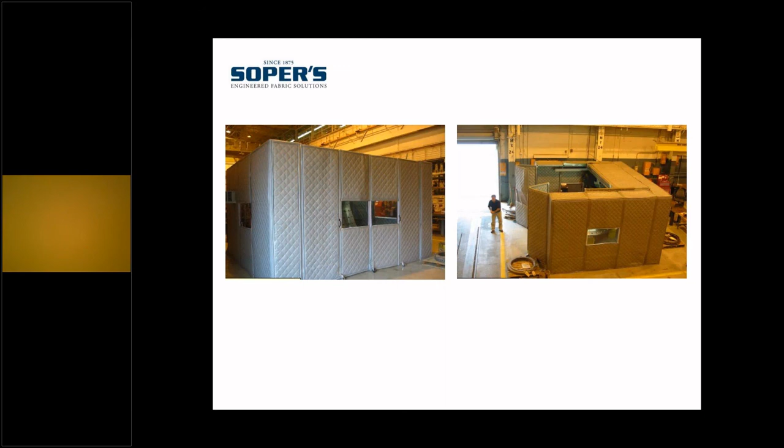We've got Berner, which does air curtains in the facilities. So what this does is it allows you to contain the good air inside of your conditioned building. So Walmart, Sam's Club, Costco, they use these at their entrances. And as you know, they work on tight margins. If these didn't save them money, they wouldn't put them in and install them.

So the cost savings to your customer can be realized in 6 to 8 months when you put an air curtain in place. So again, what we're doing is we're taking the conditioned air and blowing it down across a door opening, and then 80% of that air rolls back into the room and 20% is lost. So what we're doing is keeping insects, dust, dirt, unconditioned air and wind from entering the facility, and keeping that good air inside of the facility. So we may have a 20% air loss with our air curtain there, but that's better than the 100% air loss you'd have when you didn't have a curtain there.

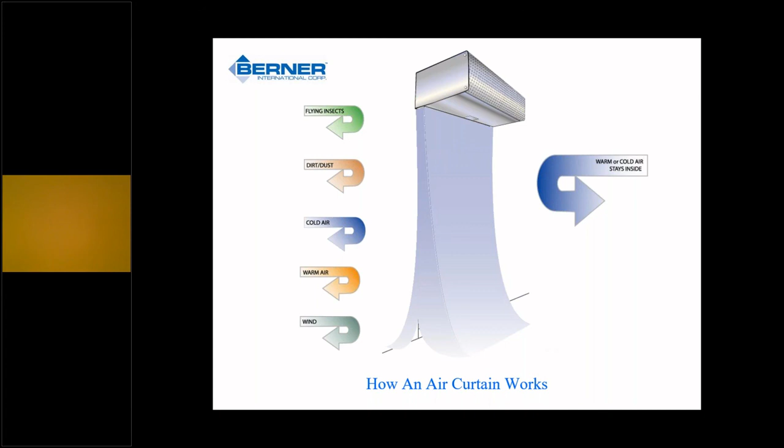So in industrial applications, these are used over roll-up doors where there's not a dock on the backside, but a ramp or ground level, where maybe this door gets opened up so they can move product to an outside storage area, or maybe take trash to a trash can or a recycle area. What typically happens in these manufacturing environments is they roll that door up, drive through it, leave that door open for 10 minutes while they're doing whatever they're doing, and come back. Well, that's 10 full minutes of complete air loss. By putting this air curtain in place, in that 10 minutes we have minimal air loss. We're saving the customer money. Even if they didn't leave this door open, but they were going in and out of this door 10 times a day, this air curtain payback would be within a year's time.

So because we're going to protect that opening, keep that conditioned air inside as soon as that door starts to go up, we can mount them vertically. We can use them in interior walls as well. Here's a horizontal, a vertical installation that we did. In this application, there was actually a process creating an odor, and they wanted to keep this door opening but blow this across so that the odor wasn't entering into the other side of their building.

We can do them over man doors. So if you think of operations that do shift changes, and they have that one door that stays open maybe for 20 minutes during that shift change, put a small air curtain over that door and they'd be amazed at the energy savings. We have an energy savings calculator on our website, which we can walk you through that whole process if you have an interest, and it will show your customer how quickly his payback will be.

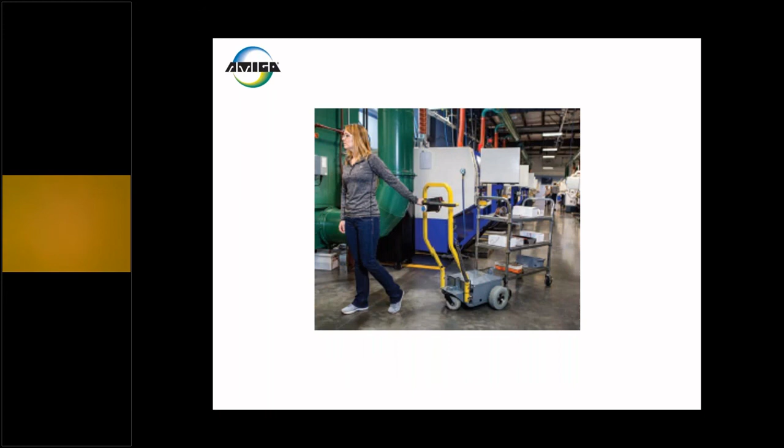It's all self-contained. There are two 12-volt batteries, an electric drive motor, and a simple 110 plug. The controls are real easy to operate up on the handlebar here. So we have people moving 1,100 pounds or less around their facility on carts, and we can tug those carts around for them, at a price point that's very economical compared to our competition.

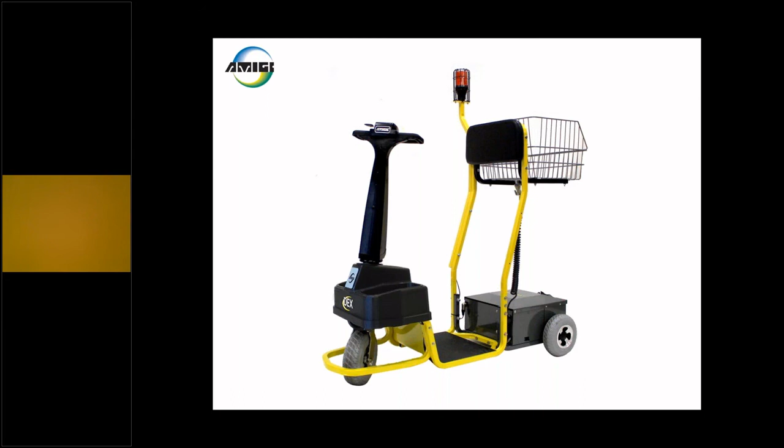To handle a larger load, then we have a people mover. This particular one is designed to move people—a person stands on it and drives through the factory. It's just reconfigured to have a person stand on it. 6 miles per hour top speed, and we can go 30 miles on a charge. We can also put a hitch on this unit so you can tug carts with it as you move through the facility.

And then the last unit they offer has a trailer on it. This trailer can be attached like you've got here. So if you think about picking operations, this is a great solution for lighter weight picking. We've had people who maybe have a pallet running around on a forklift putting goods on it—this is a whole lot more economical to operate.

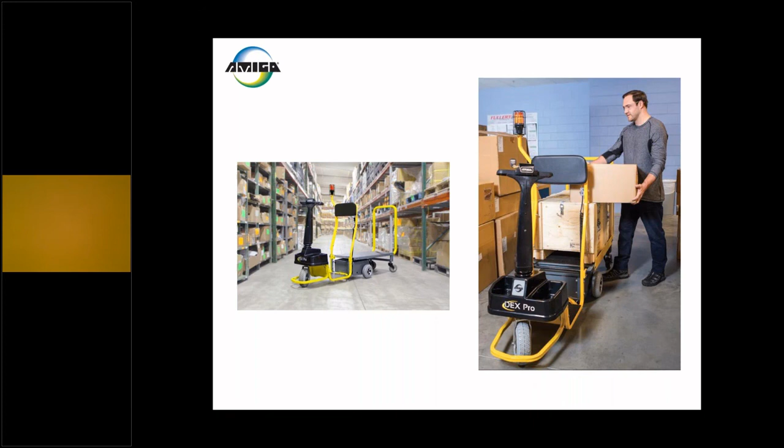Number two, we see a lot of maintenance people use these because they can put their toolbox on the back, or the product they need for maintenance, on the trailer, then drive this cart right up to the piece of equipment they have to maintain. It's only 22 inches wide, under $4,000 purchase point, so it's less expensive than those golf carts or heavy duty tuggers, and it serves a purpose—easy to get around, easy to maneuver, get up against the equipment they're working on.

And then we have a trailer that can be detachable. So in a picking operation where maybe you're picking goods and putting them on this trailer, you can release it, get an empty trailer, and go back out to continue picking while somebody grabs the other trailer and does their packaging operation.

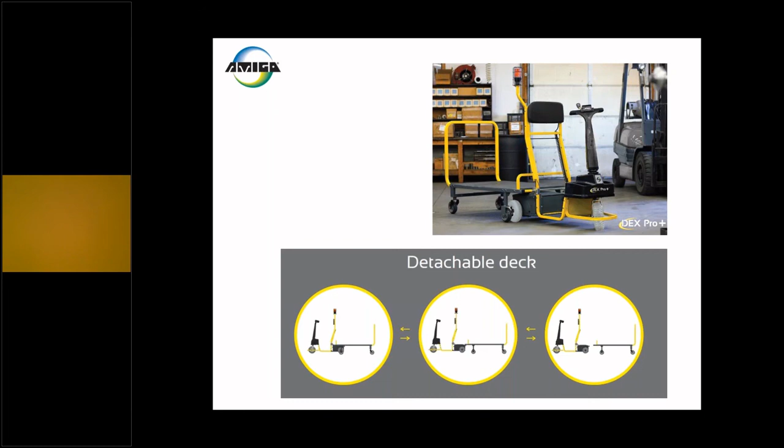So those are the lines that we represent.